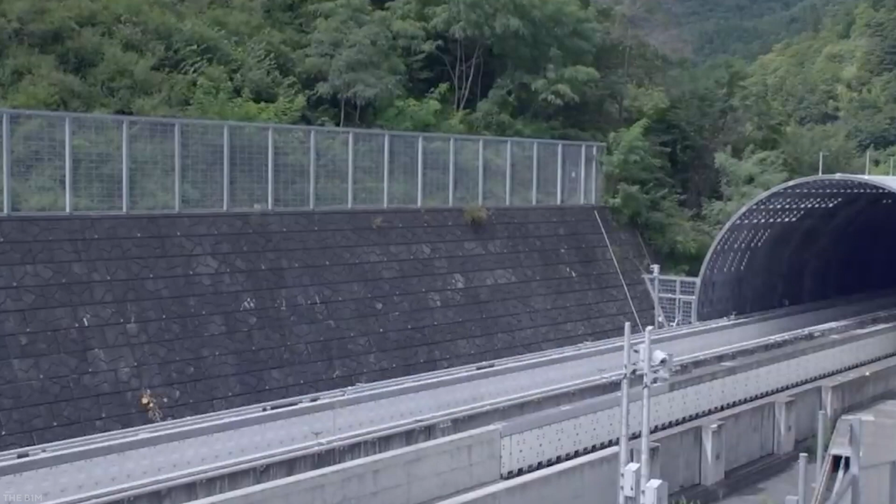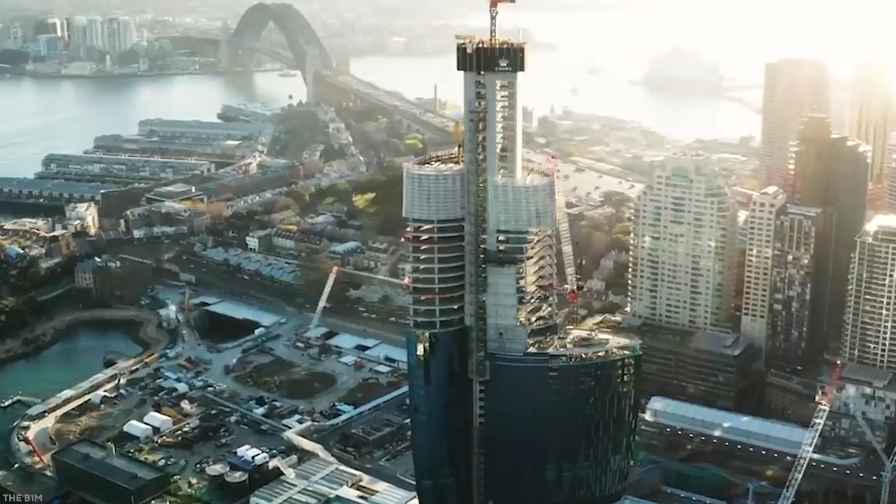Skyscrapers are setting new height records, enormous tunnels are opening up new transportation routes, and gigantic bridges are covering greater distances than ever. In addition, huge engineering and infrastructural projects are either just getting started or nearly finished all around the world. Megaprojects aren't called that for nothing. When they say huge, they really mean big. So to identify the most astounding dams, structures, and large machinery on Earth, we looked at some of the most spectacular megaprojects from the past and present. Today, we will explore 5 of the most amazing underwater megaprojects from across the world that will blow your mind.

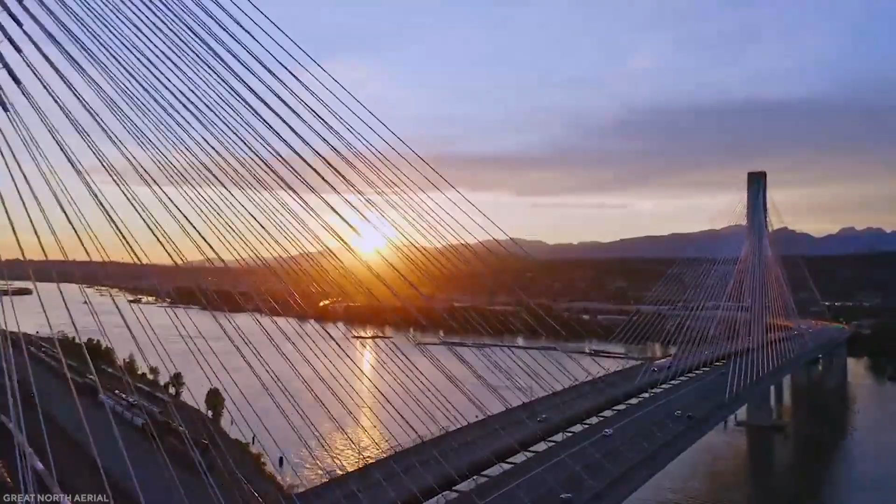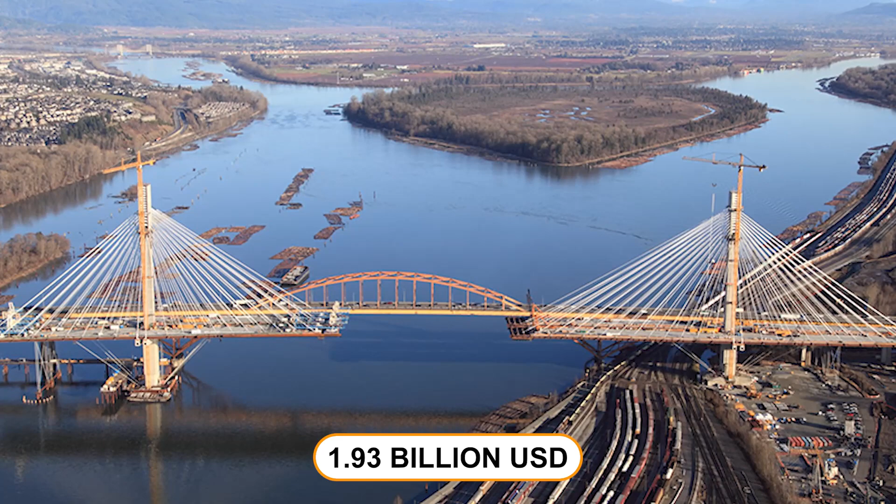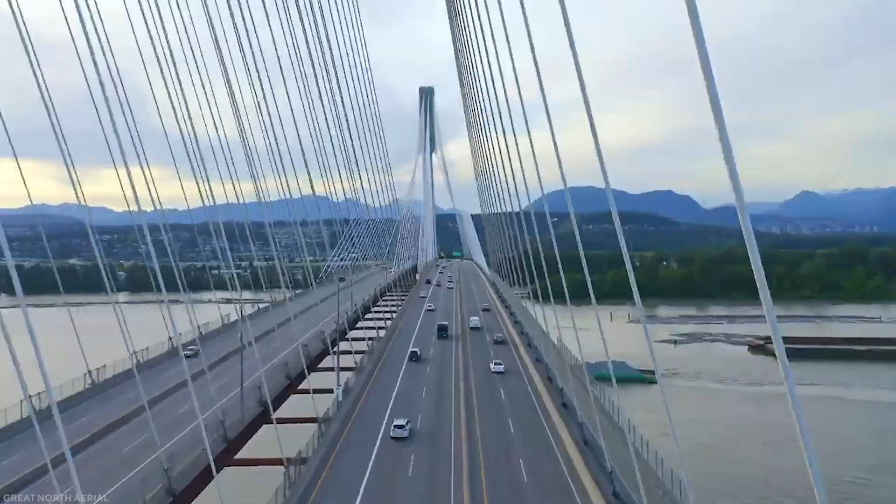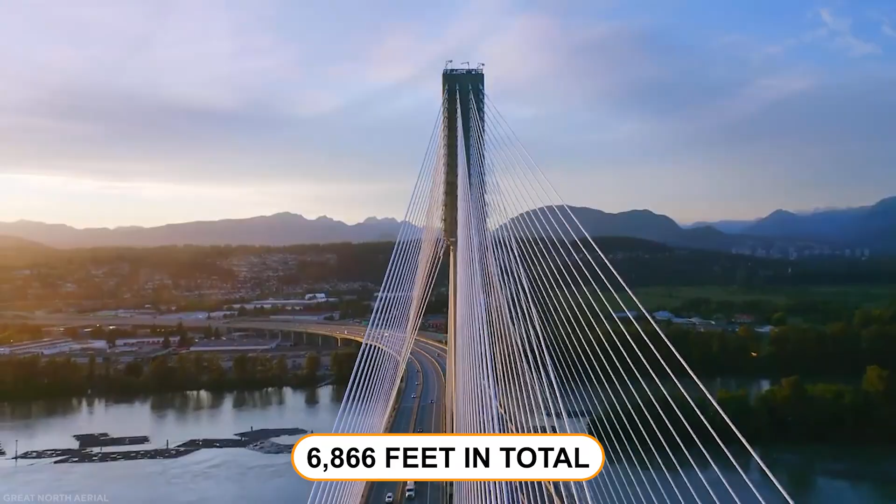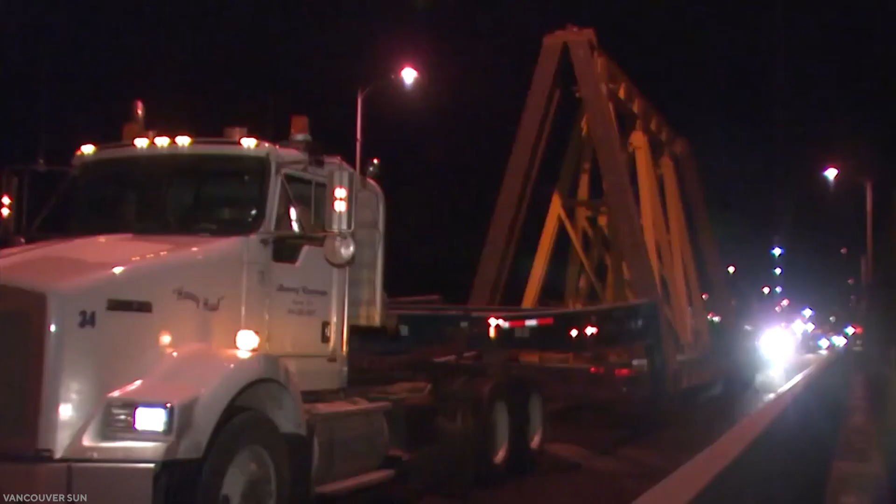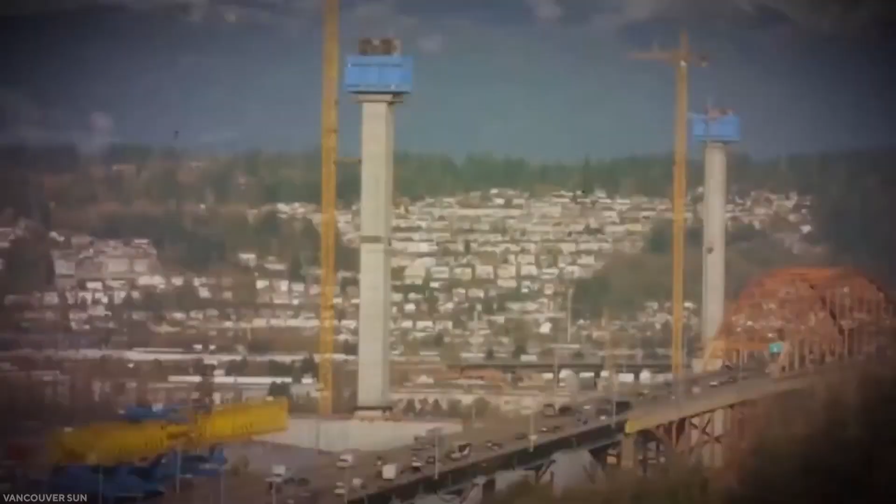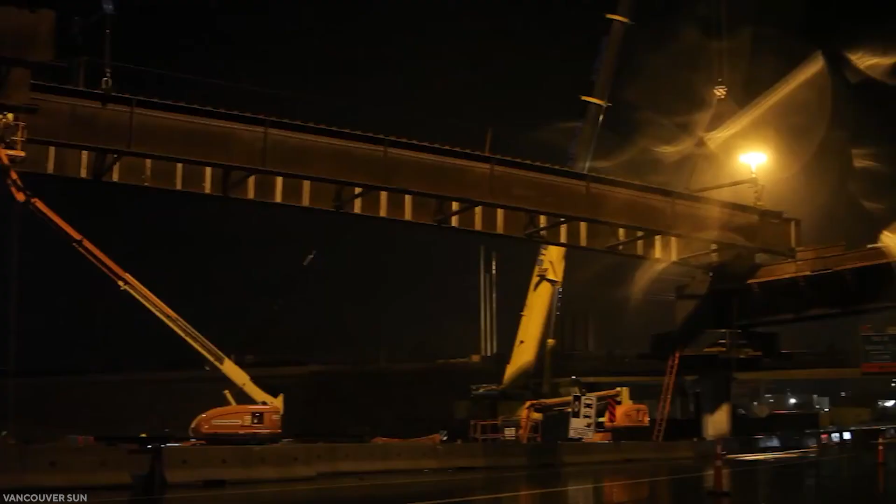There is a great deal of traffic on the Port Mann Bridge, and it was determined that more lanes were required. Initially, a preservation proposal was created that would have added a second bridge to create a pair of one-way spans, conserving the present span's aesthetic value and historical significance. But this notion was dropped. Why demolish a historic bridge when it can be maintained and the neighborhood would lose a beautiful landmark? It was decided to simply invest enormous sums of money to create one entirely new bridge and then demolish the historic bridge as a result, which led to the creation of the current project.

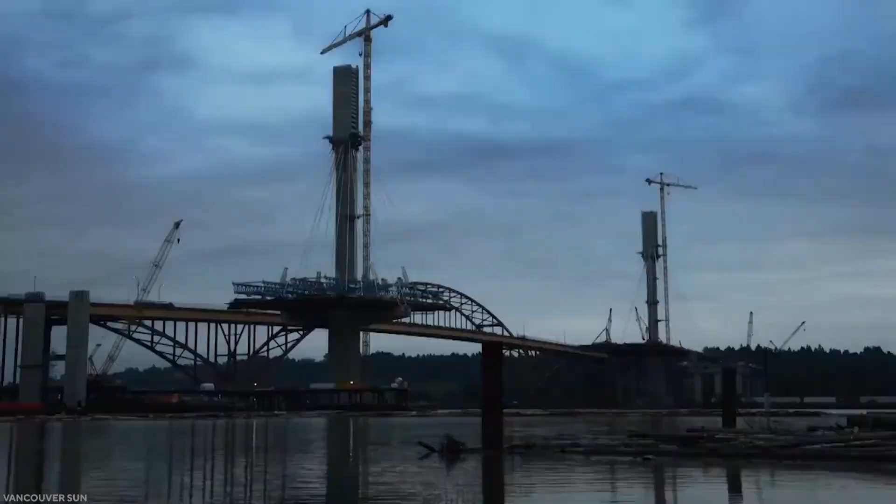2 approaches around the main bridge, Surrey to the south and Coquitlam to the north. A 720-ton self-launching gantry assembled the 1,158 segments that made up the combined north and south approaches. Each segment weighed 80 tons.

A new bridge was built to help relieve traffic congestion on the old bridge and shorten travel times. The bridge is a component of the province's bigger Gateway program, which was formed by the province of British Columbia to solve the city of Metro Vancouver's escalating traffic problems. The project's funding will come from tolls collected at the new bridge.

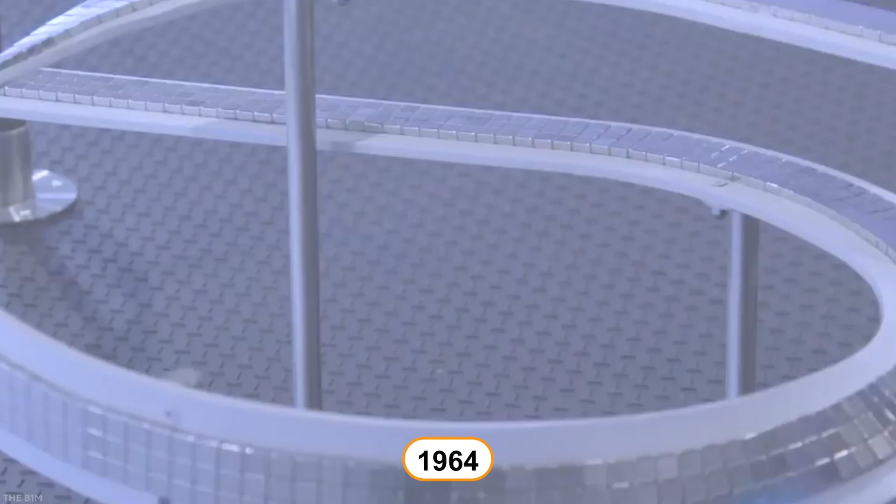The 178-mile line will primarily travel below and through tunnels as part of an unprecedented railroad project. This groundbreaking infrastructure project originated with a prototype. However, Japanese National Railways, which was determined to invest in high-speed rail, started experimenting with maglev technology as early as 1964. An 18.4-kilometer test track was built in Yamanashi Prefecture after the opening of the first Tokaido Shinkansen to test the novel magnetic levitation technology that enabled trains to travel at nearly 500 kilometers per hour.

The Chuo Shinkansen will travel along a track that was extended by a further 25 kilometers in 2013 as per the design. The new train speed was successfully tested along that same stretch, breaking the previous record for the fastest manned train in history.

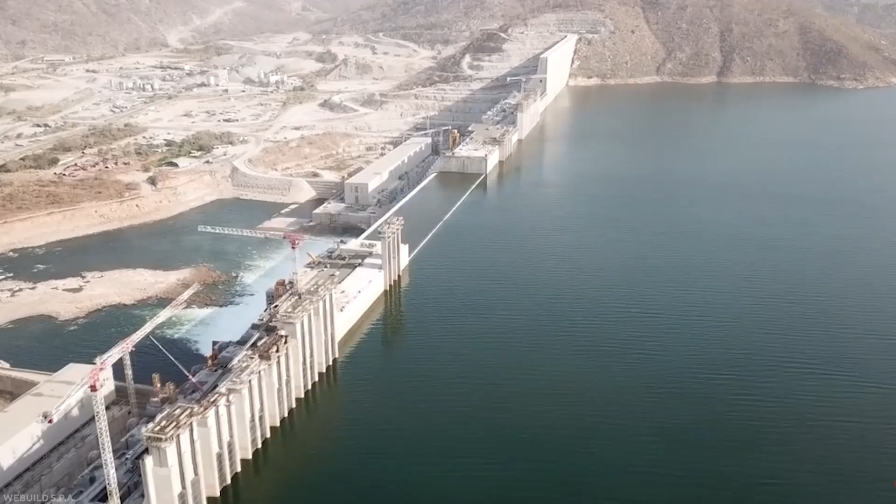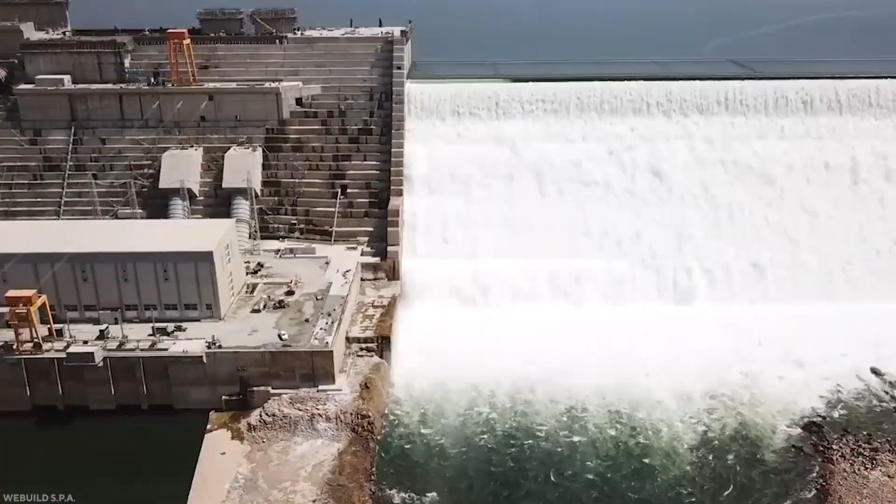Number 3, Grand Renaissance Dam. By July 2017, the Grand Ethiopian Renaissance Dam project ought to be finished. The project, which will benefit not only Ethiopia but also Sudan and Egypt, is being funded by the citizens and government of Ethiopia. Despite the fact that Ethiopia accounts for 85% of the river's flow, the latter 2 nations rely on it for their water supply.

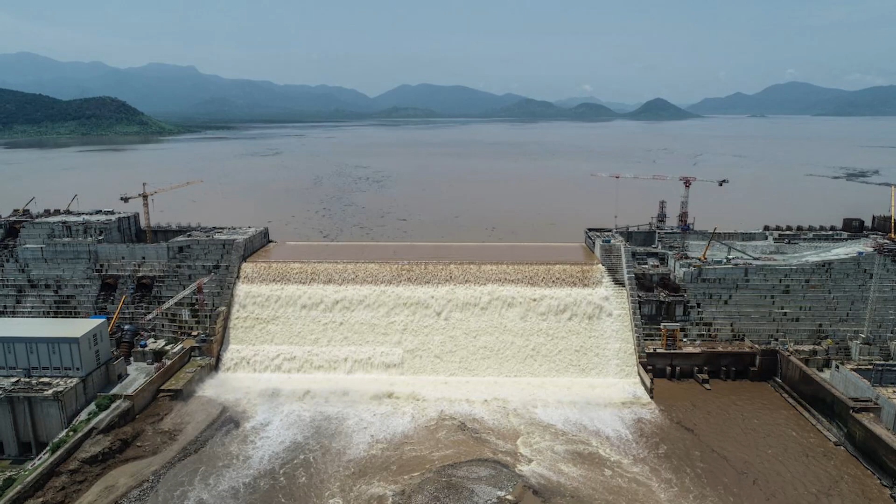The dispute over the GERD is part of a protracted conflict over access to the waters of the Nile, which are viewed as a lifeline for millions of Egyptians and Sudanese citizens living in the downstream states of Egypt and Sudan, between Ethiopia and the upstream riparians on the one hand and the downstream states of Egypt and Sudan on the other.

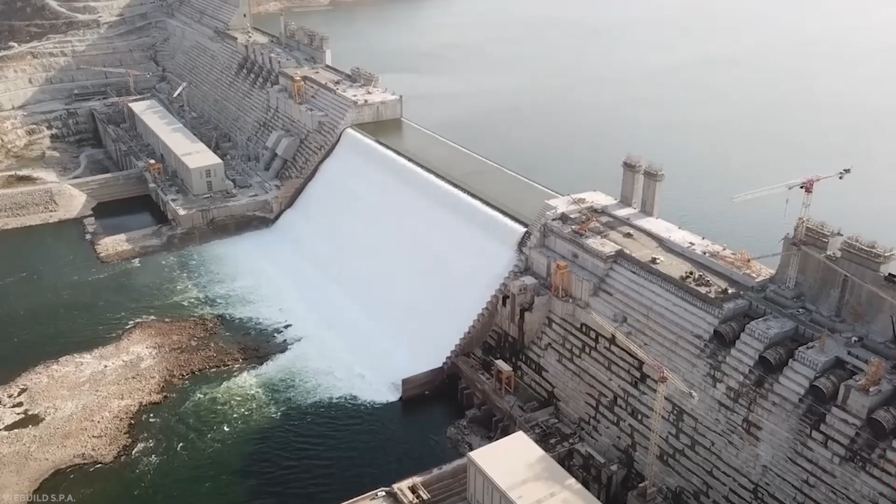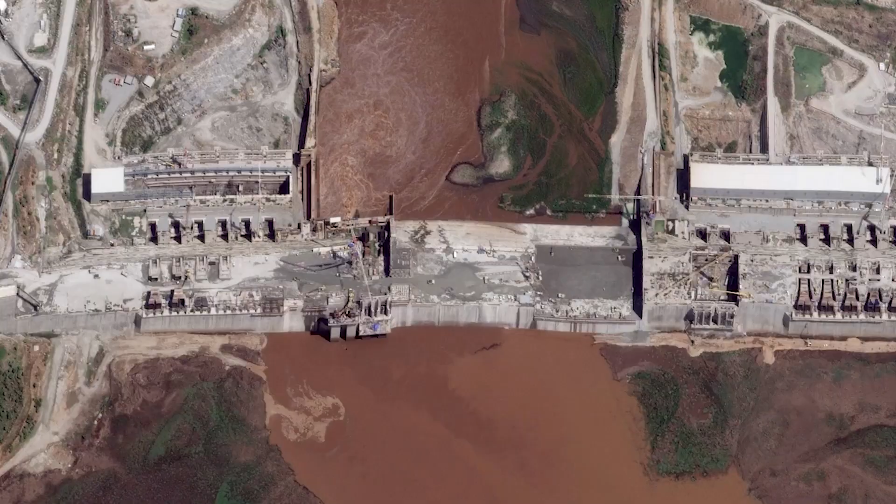Despite the fierce disputes, Ethiopia continues to build the dam, claiming that the hydropower project will considerably enhance livelihoods in the area more generally. Although disputes over the distribution of Nile River resources have persisted for a long time, the conflict, particularly between Egypt and Ethiopia, significantly grew when Ethiopia started building the Blue Nile Dam in 2011.

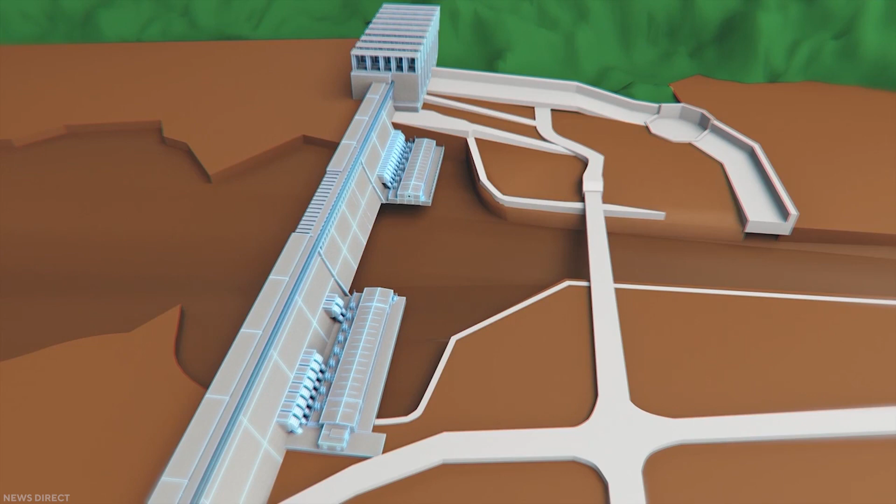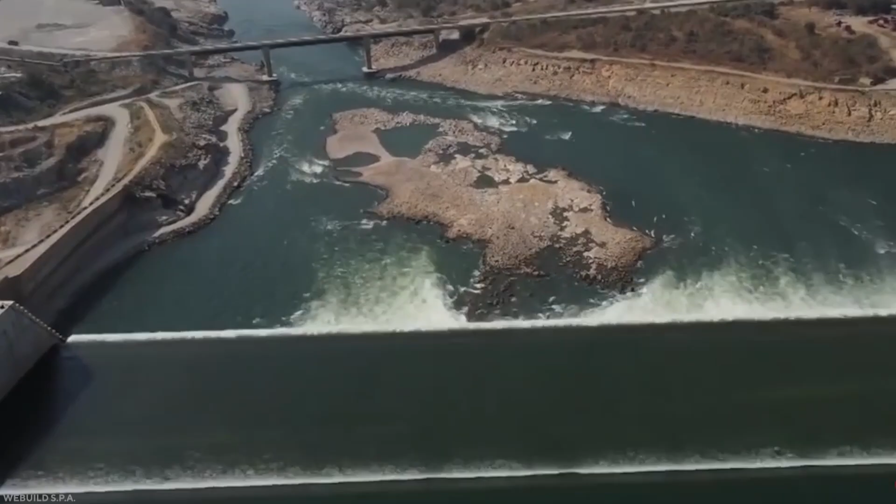Ethiopia has long argued that it has the right to use its natural resources to address widespread poverty and raise the living standards of its people. More than 85% of the water that flows into the Nile River originates in Ethiopia's highlands. Egypt, which depends almost entirely on the Nile waters for domestic and commercial uses, sees the dam as a major threat to its ability to use the Nile for domestic and commercial purposes, despite Ethiopia's claims that the hydroelectric GERD will not significantly alter the flow of water into the Nile.

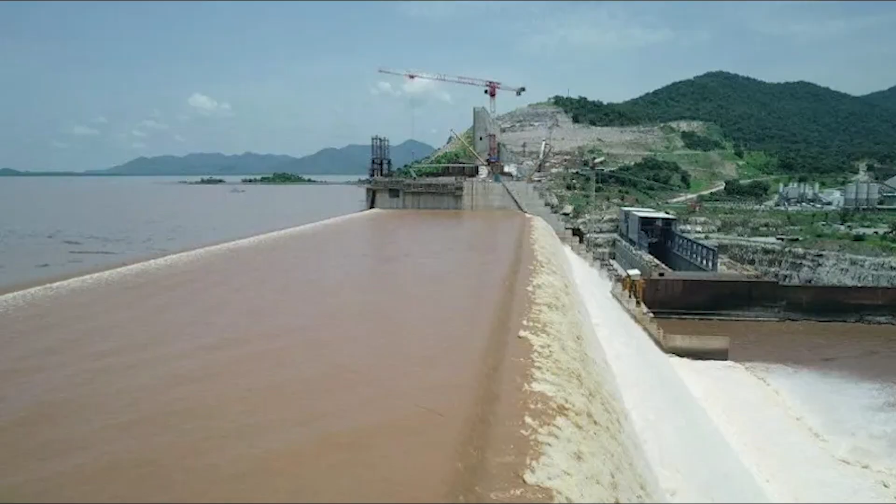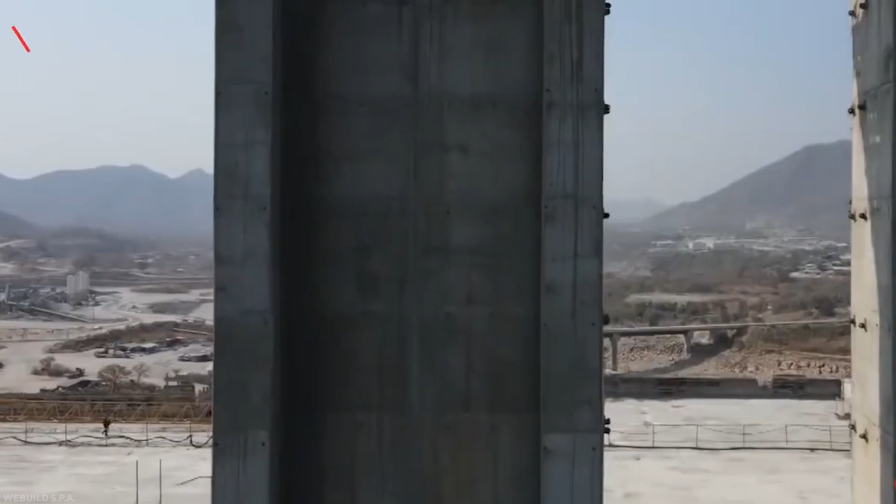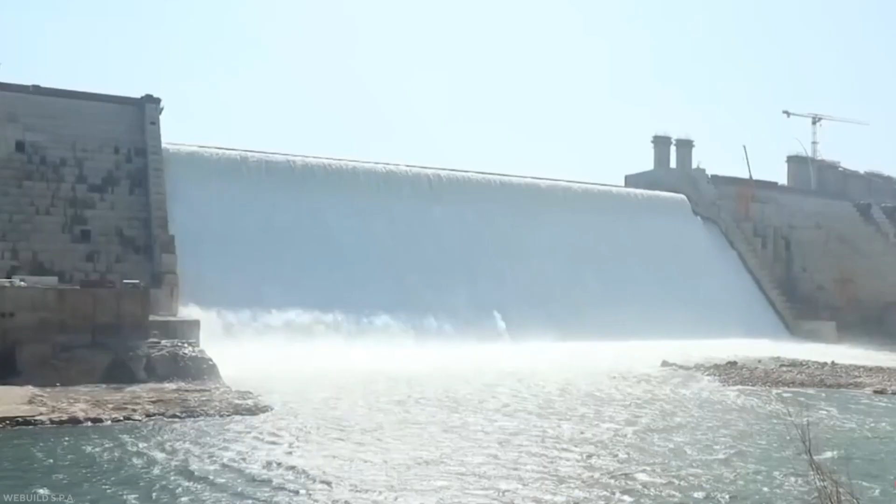Is it possible to stop? No. The Blue Nile's rainy season, which started earlier this year and lasts through September, will naturally fill the reservoir behind the dam. According to Manchester University's Mohammed Basheer, who has been researching the GERD for the past 10 years, engineering-wise, physics-wise, there is no way to stop the filling currently until the water level hits the top of the dam wall.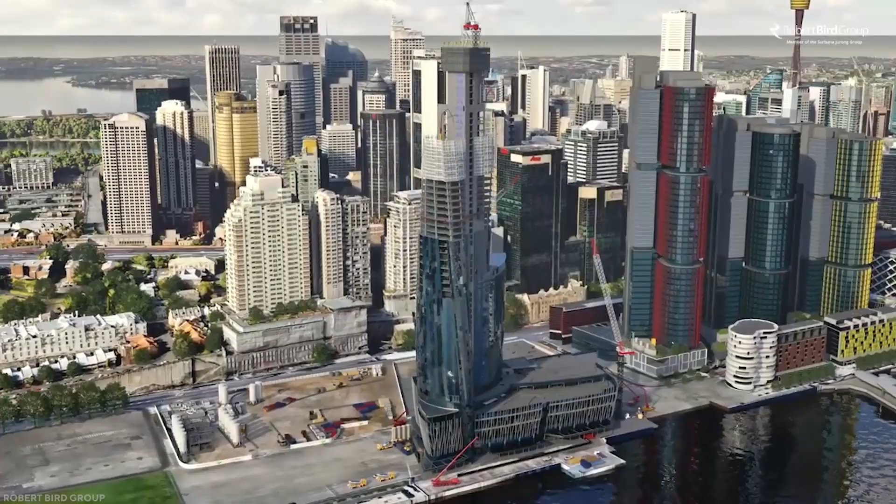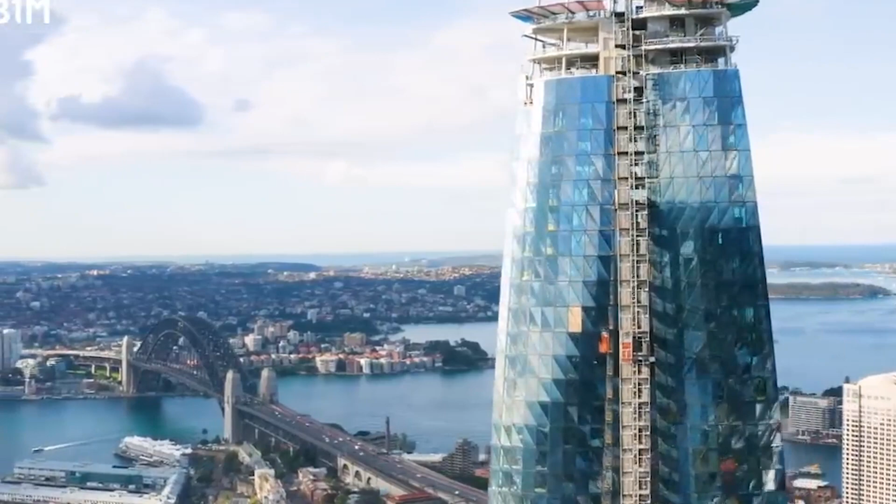The Robert Bird Group's top-down jumpstart building style, a first for the edge of Sydney Harbour, resulted in significant program savings. The sophisticated sculptural design of Crown Sydney and its placement on a congested CBD site on the Barangaroo foreshore, between Sydney Harbour to the west and another construction site, created various obstacles for Crown and their builder. The construction crew's main issue was handling the demands of operating at height in a high-wind environment like the Barangaroo foreshore and finishing the heavy lifting requirements in such a little area.

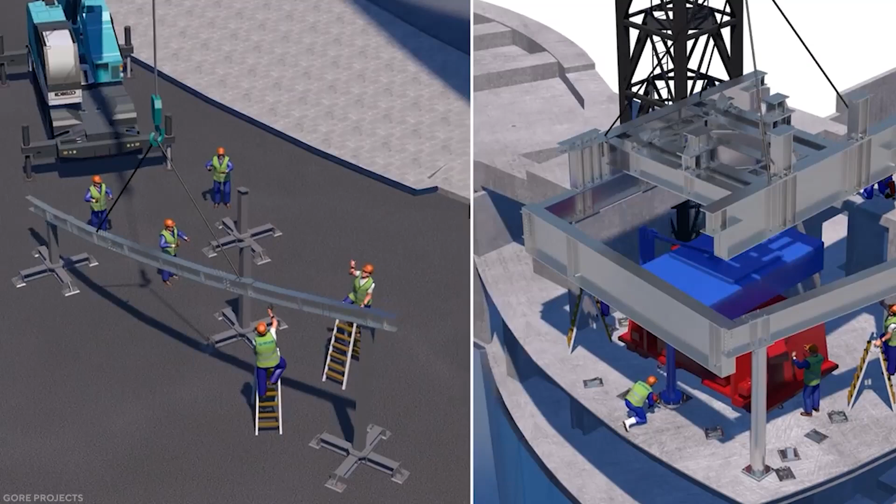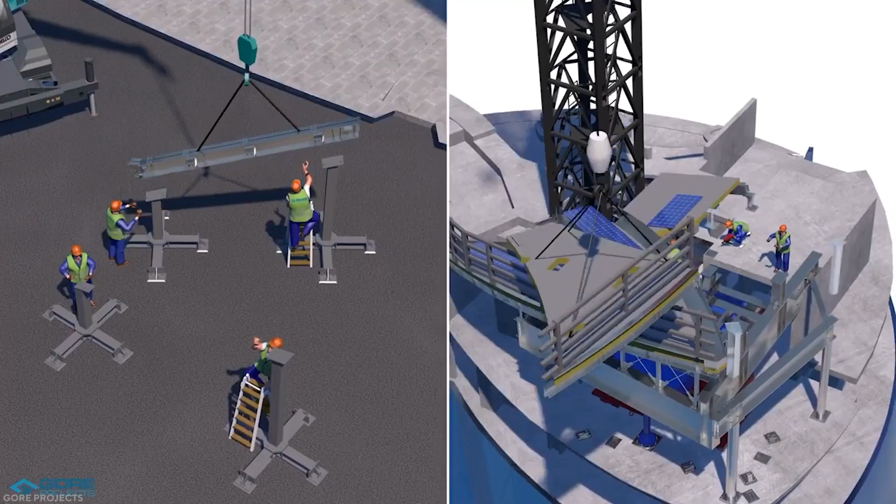A composite slab and beam structure makes up the main tower structure. A thorough analysis of footfall vibration was needed due to the large beam spans and thin slabs to ensure the building met code requirements and customer expectations, generating architectural ideas that strengthen rather than dismantle the current structure. A method that minimized beam penetrations and beam notches was developed after extensive coordination with a mechanical engineer. Analysis of differential shortening with megatruss, steel, concrete, and existing structural elements was taken into account. Mega column and mega pile designs were used to withstand the heavy concentrated truss loads. The 2,100mm diameter mega piles needed to withstand the truss loads had to be built, which required specialized piling rigs.

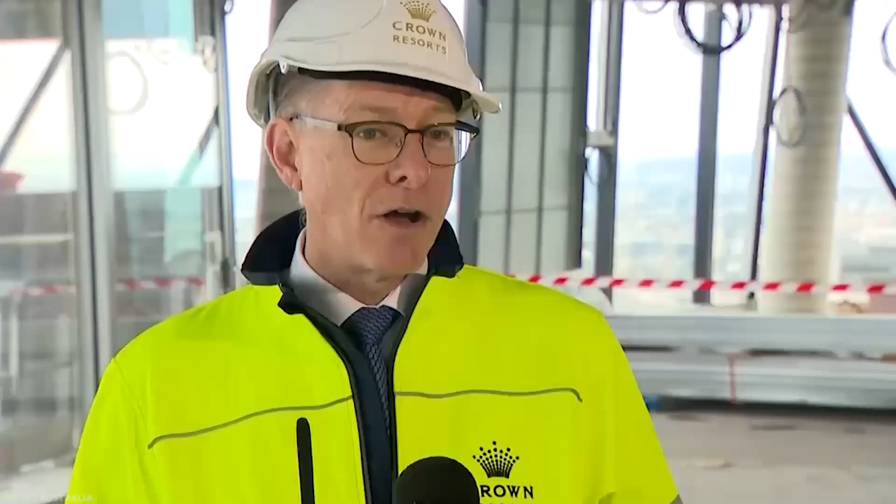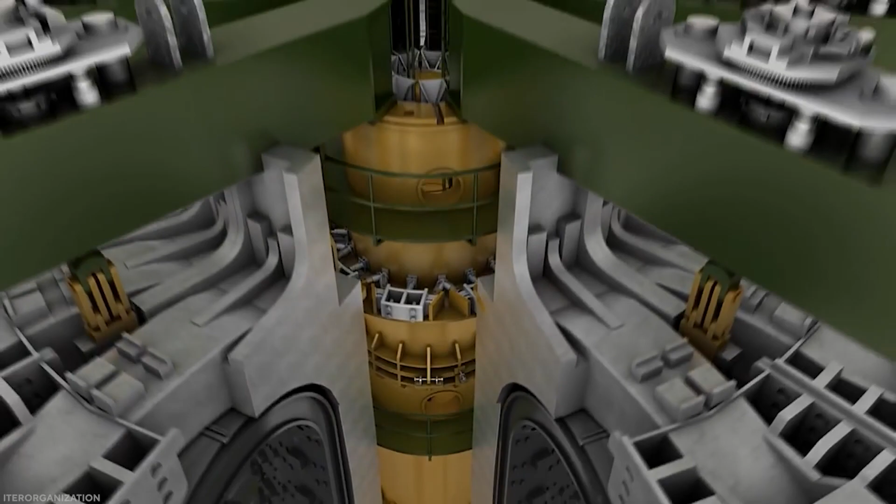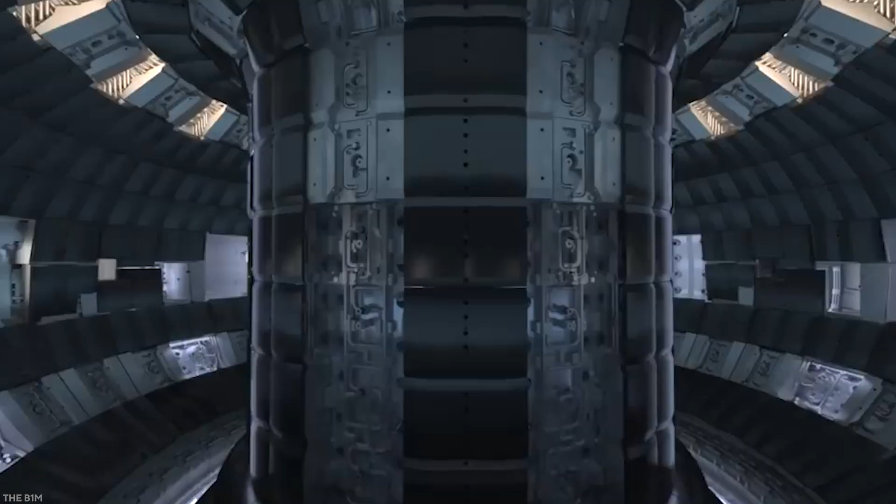Number 1, the International Thermonuclear Experimental Reactor. ITER, which is Latin for 'the way', is an acronym for the International Thermonuclear Experimental Reactor, a nuclear fusion power plant. ITER is a unique partnership of nations jointly responsible for constructing, operating, and decommissioning an experimental fusion facility. Being an experimental reactor, it will allow the study of fusion reactions which govern the Sun and other stars.

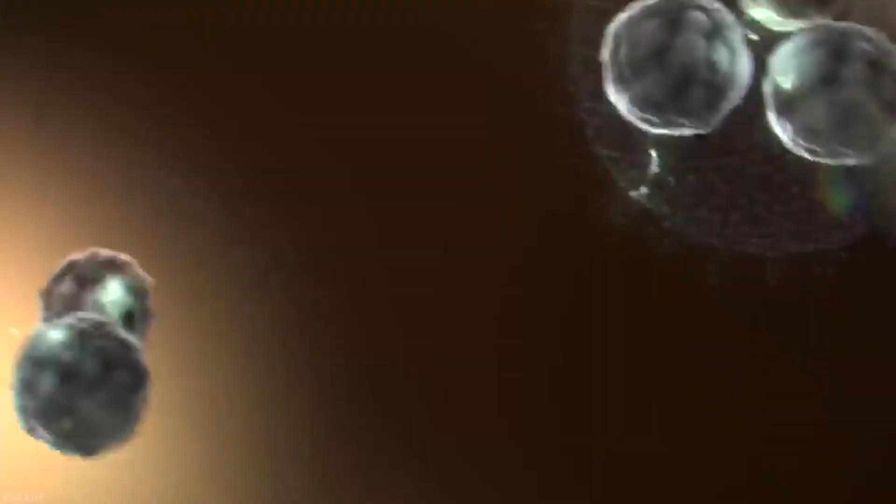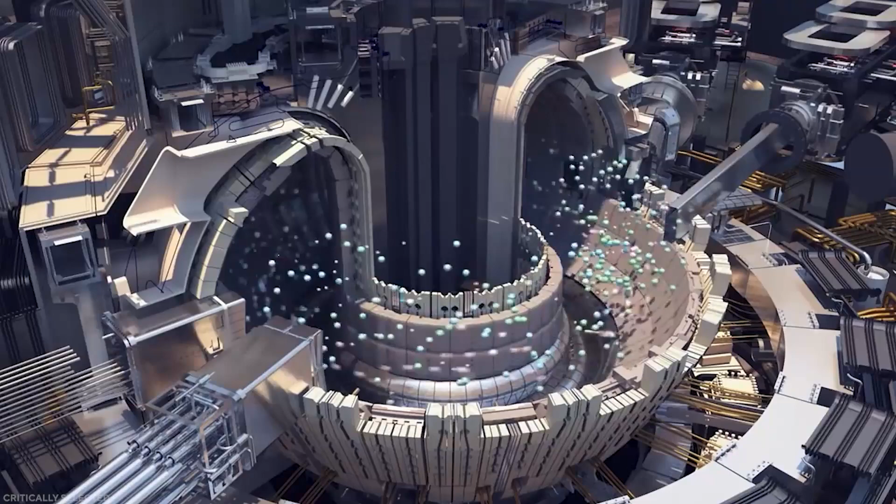Nuclear fusion will take place in the form of plasma in a tokamak. The ITER project is experimental in nature, as the name suggests. It's a collaboration of 6 countries and 1 European Union, run, funded, and designed by 7 members. Since the initial conception of a global joint fusion experiment in 1985, thousands of engineers and scientists have worked on the design of ITER. In a 35-year partnership to construct and run the ITER experimental device, the ITER members - China, the European Union, India, Japan, Korea, Russia, and the United States - have advanced fusion to the point where a demonstration fusion reactor can be developed.